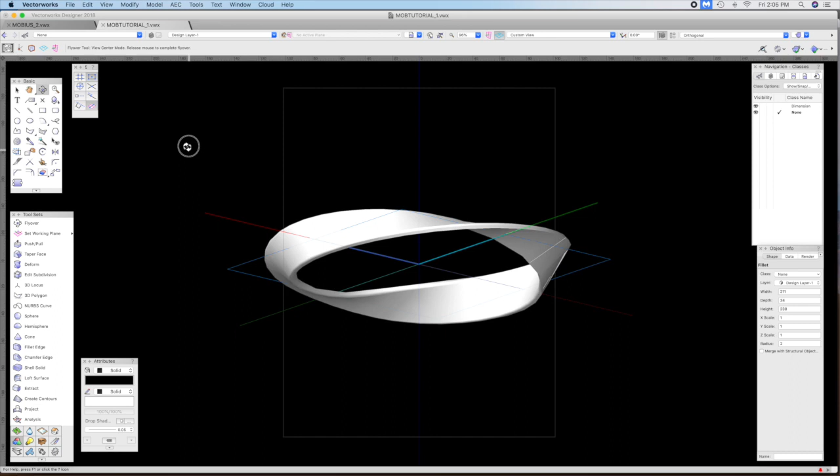This tutorial shows how to make a continuous band with a 360-degree twist using a line and a circle. Begin by drawing a circle the size of the grid in a 3D view. Go to a right view, choose the rectangle tool, and draw a rectangle like I've shown. Dimensions are not critical. Go to the line tool and snap from top to bottom.

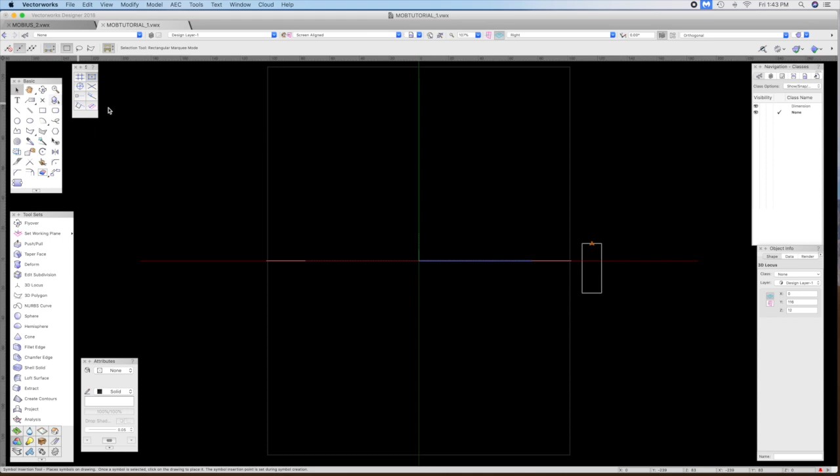Then the Modify menu, convert to Nurbs. Now go to the 3D locus and put a locus point at the top of the line. Select all the objects and group. Select both objects, go to duplicate along a path, use these settings shown, click OK, and ungroup.

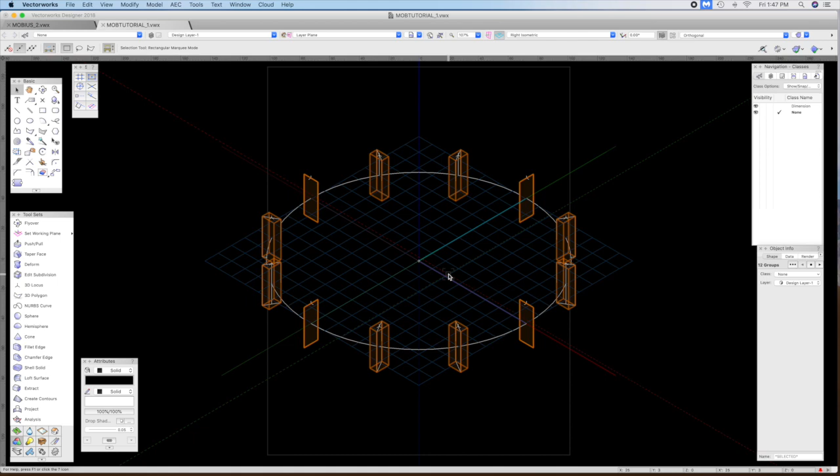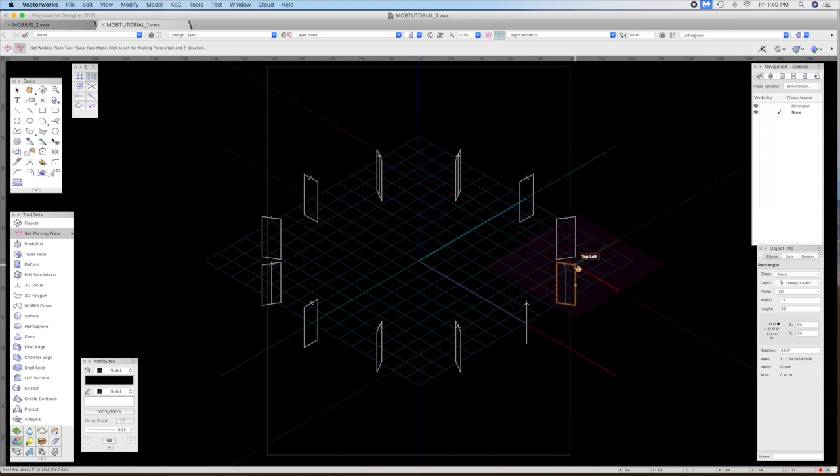Now remove the circle, and your first box is your starting point, so you don't remove it, just leave it alone. Now select the second box and go to Set Working Plane, click on it, set the working plane, go to Look at Working Plane, zoom in if you have to, remove the box, select the locus point and the line, and rotate 30 degrees.

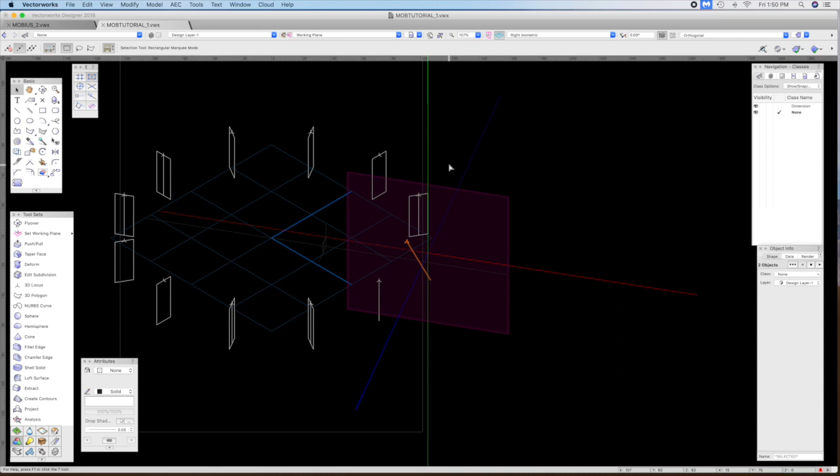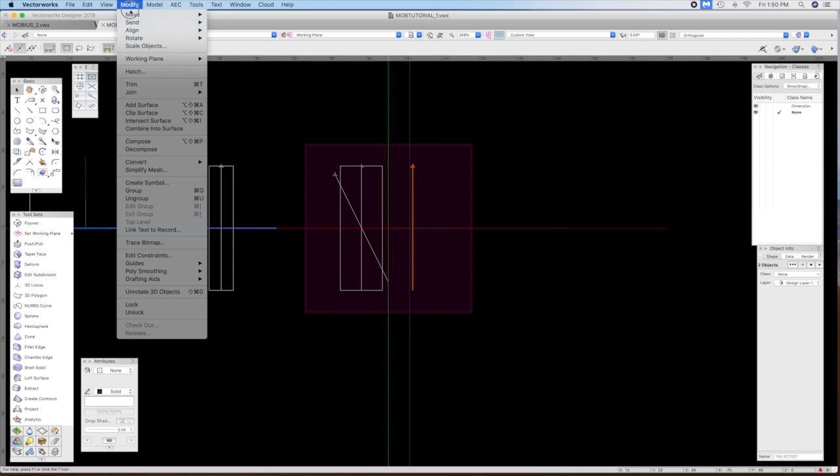Continuing in a counterclockwise motion, you'll select the next box, set working plane, look at working plane, remove the box, select both objects, rotate again, but this time add another 30 degrees, 60. You'll continue this process until you come all the way around the circle.

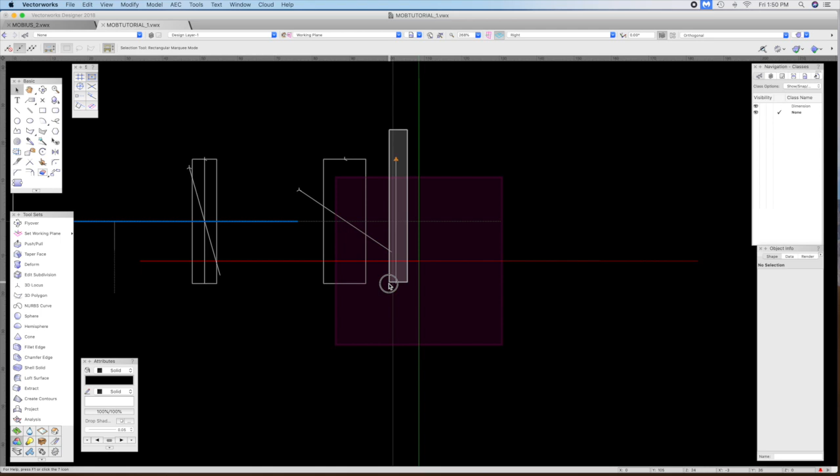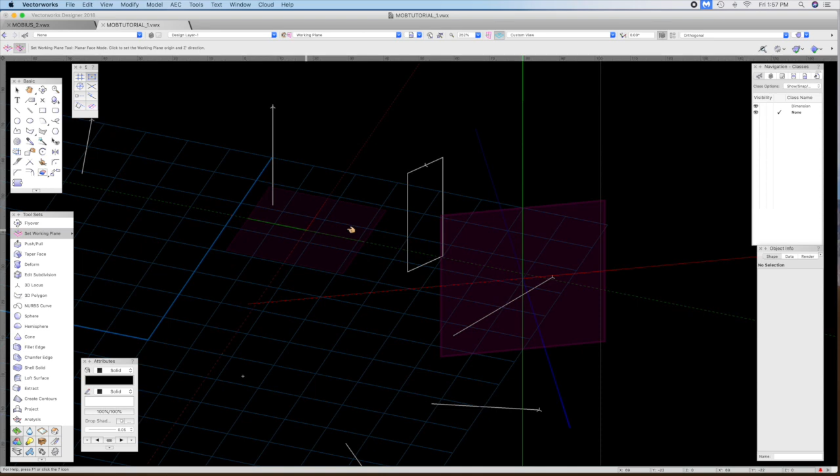Set working plane, look at working plane, remove the box, select both objects, rotate, add another 30 degrees. When you reach the final box, and if you've done everything correctly, your final mathematical input will be 330 degrees, because your first line is both 0 and 360.

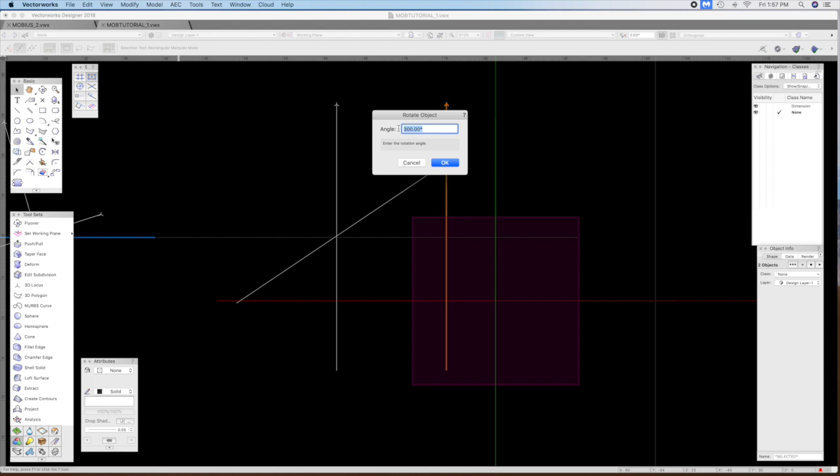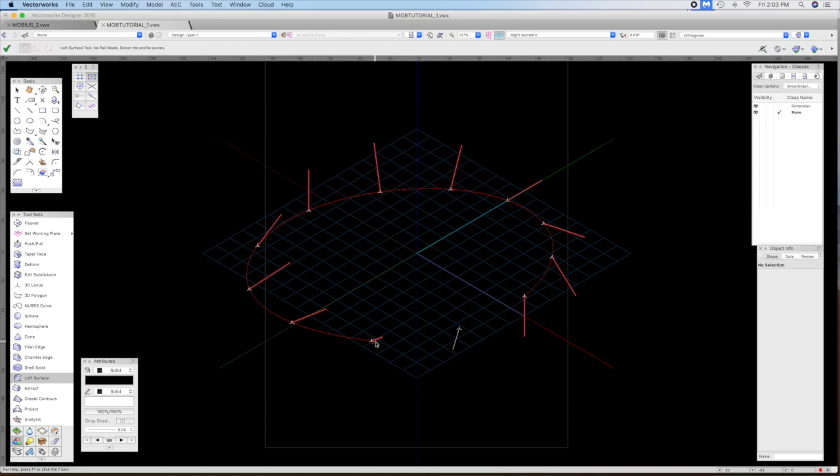Now you choose Nurbs, no rail, and pick the end of the line where the 3D locus point is. It was only ever there as a placeholder, so you wouldn't get lost when you were doing this part of it. You can't select the last one. Just hit the return key or the green arrow and just choose close these settings.

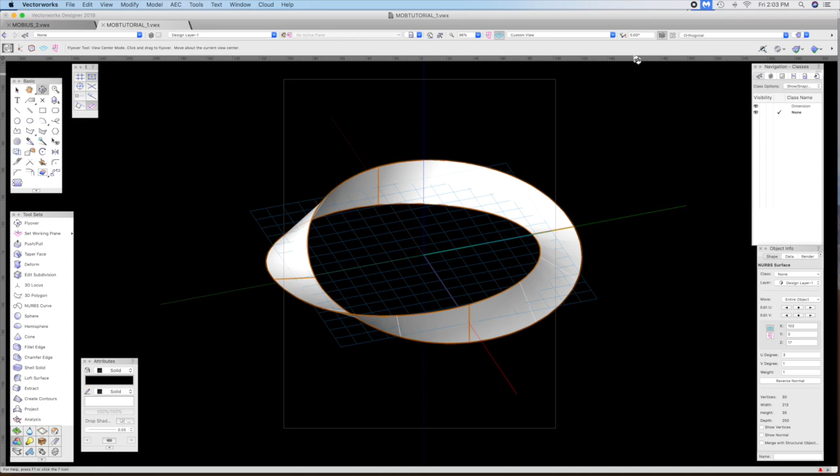The reason I chose the line method only was because it's your most basic primitive. And you can always go forward, but going backward is difficult. So this would be a ribbon. But if I wanted to make it thick, like a band, I'd choose the shell tool, give it a thickness, maybe 4 millimeters. Then I could take the fillet tool, give it 2, select the top curves, and then make them round.

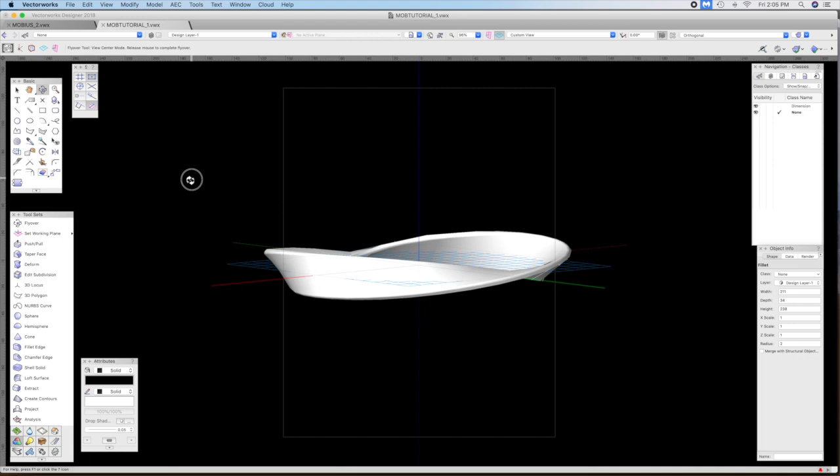We could be finished if this is all you want, but with Nurbs you really are never finished. There's always somewhere to go. For example, choose Extract, an isoparm, and just click on a point. Now you have 2 isoparms. Ungroup. Then if I put a circle in here and select the isoparm and the circle, and go to model, extrude along a path. It puts a ring around the entire object.

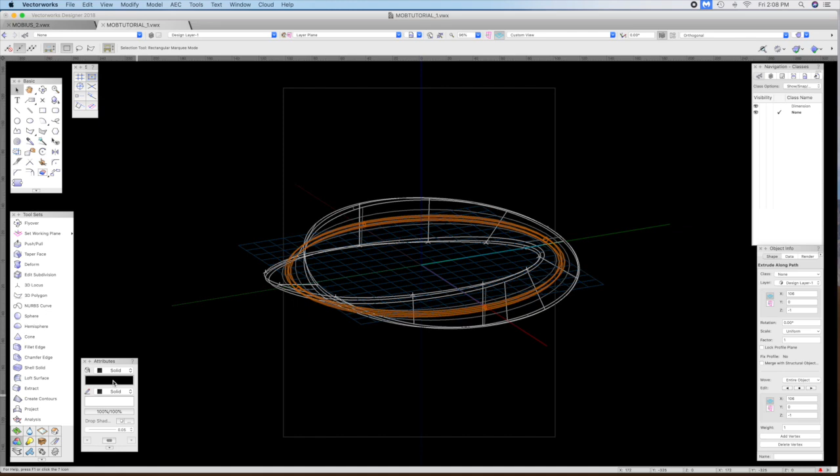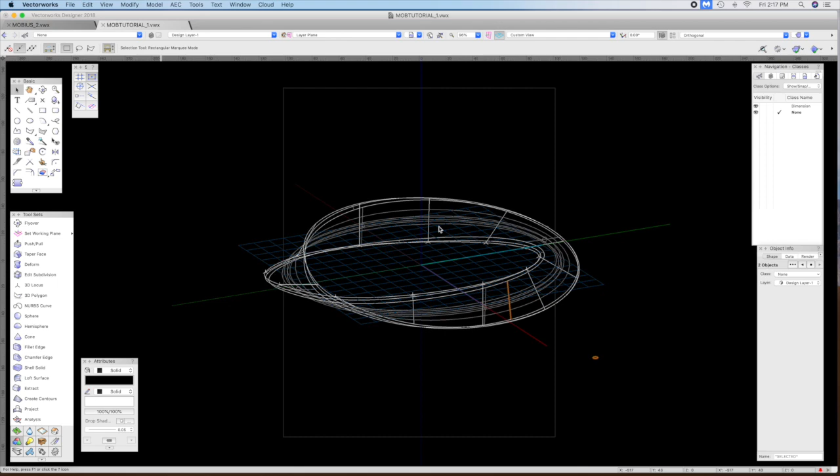You are not restricted to the path of the band. You could choose the vertical isoparm that was created, or you could choose any of the lines that I've just highlighted and do an extrude along a path. Give it a color so you can see it. Then you could perform subtract solids or add solids with this, and you're not restricted to just the design itself.